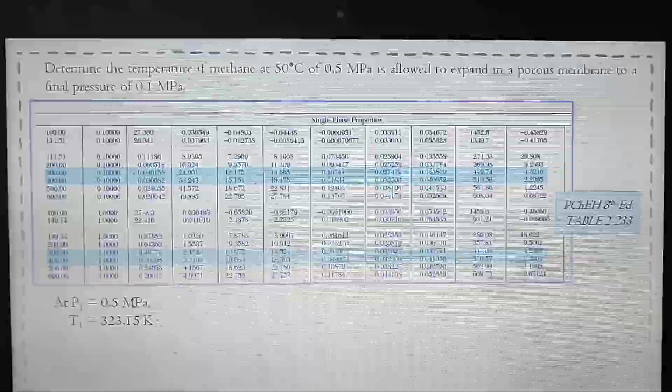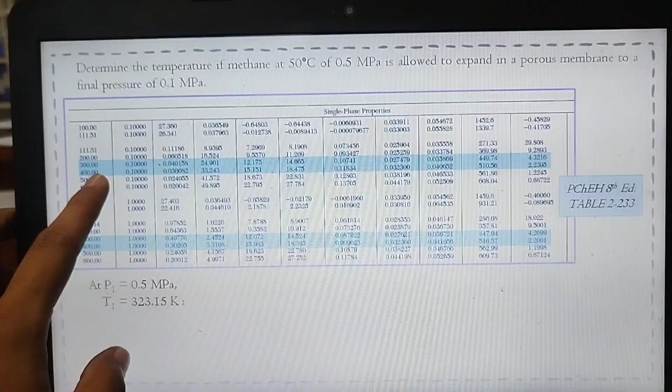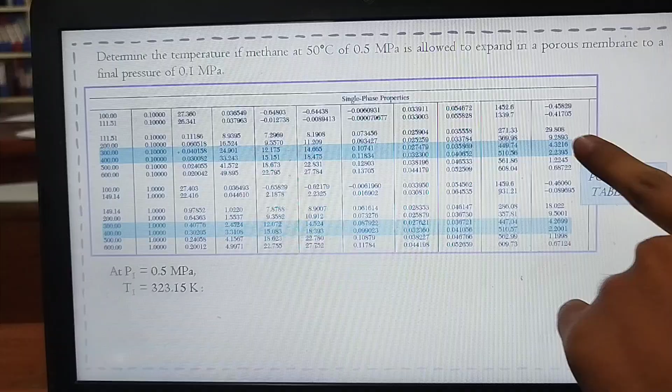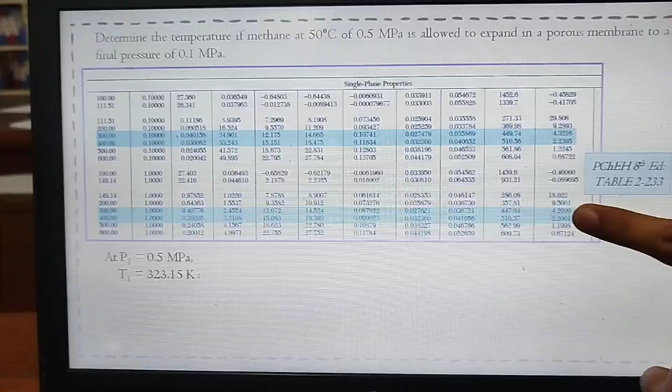Okay, so your concern was how to interpolate this, no? So, double interpolation natin. So, we need to get the value of our Joule-Thomson, no? Joule-Thomson coefficient at 0.1 MPa and 1 MPa. Kasi, ang kailangan natin ay 0.5 o walang 0.5 dyan. So, we need to get the Joule-Thomson coefficient here sa 0.1 MPa and then get the Joule-Thomson coefficient at 1 MPa.